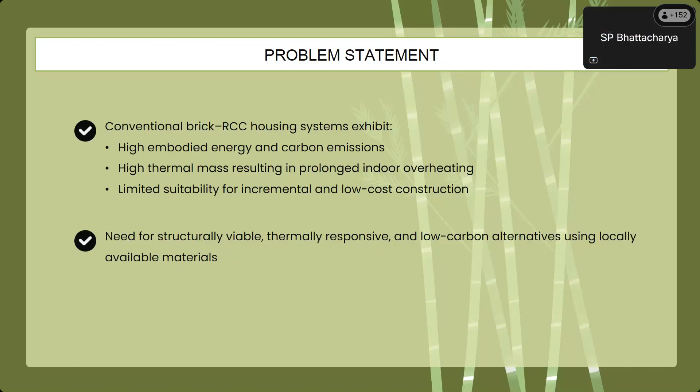There is a lag. No, I want the previous slide. They have high embodied energy, high thermal mass, resulting in prolonged indoor overheating, and limited suitability for incremental and low cost construction. So these are some of the problems.

Therefore, there was a need for structurally viable, thermally responsive, and low carbon alternatives using locally available materials.

Can we go to the next slide? I can share the screen if you're finding there's a lag from your end. There's a lag actually. Would you stop sharing and let me share? Yes, I think that will be good, sir. I'll stop sharing, you share. Let me share. Yes, sir, I'm sharing now. Okay.

Can you guys see my slide? Hello, is the slide visible? No, sir, no, sir, no, sir.

Is it visible now? Yes, sir. Yes, kindly make it full screen if possible. Full screen, sir. I've done it from my end. So is it full screen? It is visible. Okay, yes.

Okay, great. I hope there wouldn't be a lag if I share it from my end.

So how did the project come to us? This is basically part of an incubation project under the Global Housing Technology Challenge. The ministry had launched this challenge in which there were cutting edge technologies from across the world adopted for new construction of houses, enabling speedy construction and many houses. There were also some construction technologies that needed handholding. So the bamboo construction technology that is happening at the moment, or that we found required to be incubated, and that's how the project came to us.

The major focus is not just component level innovation. That is, we used to have component level innovations when we innovated lintels, beams, or door frames. It's not just component level, but more holistic, from system level innovation integrated to a full building. So we wanted a full building innovation, and evaluations were conducted through full scale prototypes.

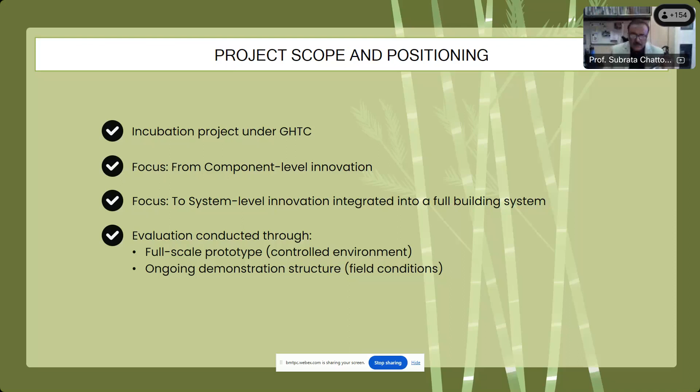Waterlogging was seen, dampness we saw in some cases. So these were some of the issues we found that we need to solve. And then we went about designing.

As I said, we did an extensive field study and laboratory study of the different species we get, and then we chose the species that came out ticking most of the boxes. That species we treated in a borax and boric acid solution, so each bamboo component had been treated for 2 weeks before use.

We also installed a bamboo shredding machine in our lab, which can shred bamboo pieces within seconds, so we don't need to do it manually. Next, the prototype concept was developed because that is how we want to make it foolproof.

So a true scale prototype, 8 feet by 8 feet square, with a built-up area of about 5.9 square meters, was built in our lab. It was constructed in the IIT Incubation Center under STEP, which stands for Science and Technology Entrepreneurship Park. There we hired a space that was our lab, and there, as you can see on the right hand side, we made this prototype stand in full scale.

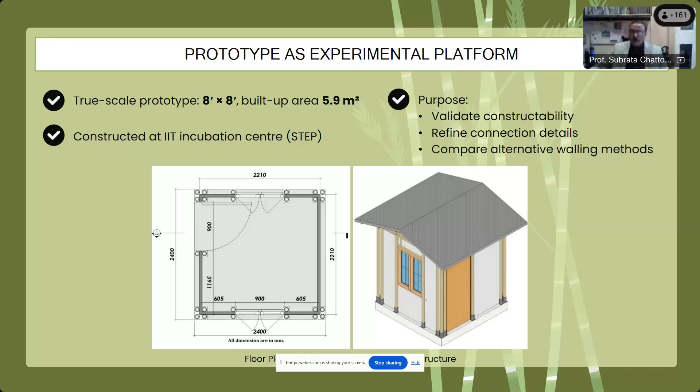The purpose was, we wanted to validate the constructability. We wanted to refine the connection details because when we were doing the local survey, we found that bamboo was also prone to cracking from the connections, so the connections had a real problem. We wanted to refine those connection details and compare alternative walling methods with our methodology that we were going to invent or develop.

Here you can see some of the salient points, the structural and envelope components of our prototype. We were using bamboo reinforced concrete plinth beams with MS connectors. We had built-up bamboo columns and bamboo reinforced mortar, which we call BRM walls. We also had bamboo lintels and beams, bamboo trusses and lightweight roofing, and bamboo doors, windows, and jali. So these were all our structural and envelope components with bamboo.

Now here you can see what were the dimensions. The BRC plinth beam design had a cross section of 250 millimeters by 250 millimeters, and bamboo reinforcement was used. We did not use any steel reinforcement. You can see on the right hand side, during the construction phase in our prototype, in our lab, we did that. This was an integrated MS connector cast within the beam.

As I said, we found that in the traditional system, the bamboo posts or pillars were getting rotten, prone to rotting from the point where they emanated out of the concrete. So we wanted to integrate in our plinth beam a system of MS connectors. This was motivated by our prior experience developing a school building with BRC, which has been in place since 2014, and potential cost reduction was also seen.

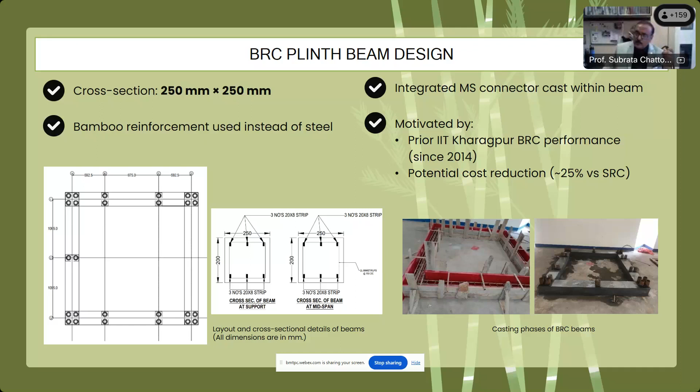Next, I show you what this base connector and geometry is that I'm talking of. We did some experiments on wind loads and other different kinds of load, and we found that the major pillars should use multiple bamboo culms. Instead of a single bamboo culm, we went for a system of 4 bamboo culms for the major columns, and the intermediary columns we did with single columns.

Now these 4 bamboo columns would have these base plates. This is an MS base plate that we developed, and this is one of the innovations that we are putting up for patenting. This will solve the issue of the rotting of the bamboo, and this can replace one bamboo at a time in case you need to replace it.

So the base plate cross section was 240 millimeters by 240 millimeters. We had 4 MS pipes of length 150, diameter 90 millimeters, and thickness 5 millimeters. They were anchored by a bolt of length 170 millimeters, and this enables axial load transfer and wind load resistance. We found that this really helped a lot in terms of transfer of wind load and load transfer.

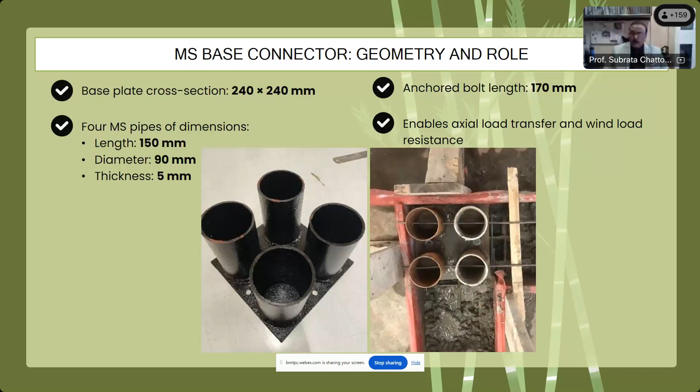Next, in this slide, we are trying to show you the built-up bamboo columns configuration. As you can see, this is from the real pictures. So multiple bamboo axial members, as I said, 4 bamboo columns, with the culm embedded into the MS pipe at 150, and the length of the MS pipe was 150, so it was secured in the MS pipe. The packaging tape, which is a waste product, we use to tie. You can see in the left slide here, this packaging tape we selected. Now, due to higher load capacity and the column typologies, we had the corner columns with 4 culms and the interior with 2 culms. So this is the configuration of the prototype.

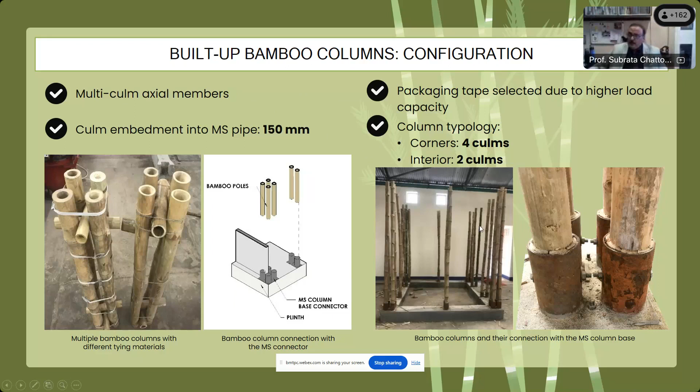I hear some voices. Do you have any question here? Yeah, thank you very much.

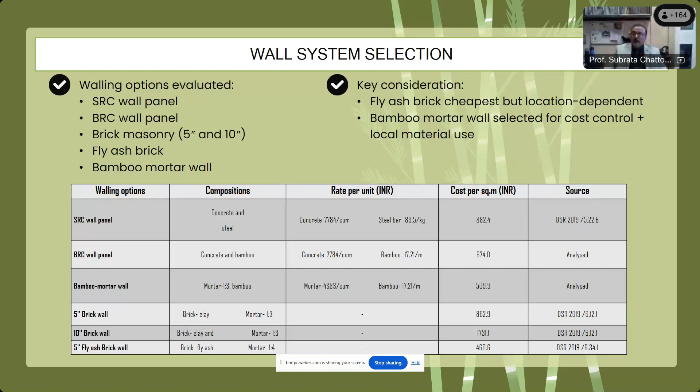We applied the DSR rates of 2019, DSR 5.22.6. When we did the comparative analysis of cost per square meter, fly ash bricks came out the lowest and bamboo mortar walls came second lowest. But fly ash has its own limitation - it is only available at sources where fly ash is generated. So we ruled it out, because we were concentrating on areas where bamboo is available, not necessarily where fly ash would also be available. That cost was coming to around 509 to 510 INR per square meter.

Next, we show you the bamboo reinforced mortar, or BRM, wall panel, and how we did it. We did a thin mortar matrix reinforced with bamboo strips - you can see the strips, and I'll give the dimensions and spacing in a bit. The bamboo here acts as a distributed tensile reinforcement; bamboo's properties are very similar to that of steel. We also used chicken wire mesh for confinement of the mortar, and we felt this was suitable for both precast and cast-in-situ execution. We actually did both types in our prototype.

Here you can see the BRM wall panel lab-validated specifications. The panel size is 1 meter by 1 meter. The bamboo strips, which we shredded in our bamboo shredding machine, were 20 millimeters by 6 millimeters. The spacing in the X direction was 120 millimeters, and in the Y direction was 40 millimeters. One issue bamboo poses is that because of its shiny outer surface, bonding with concrete or mortar is a big problem.

This is something people have been experimenting with for some time. To overcome that, we used a Sikadur 32-LP gel with medium sand. We painted this Sikadur onto the bamboo with brushes, and when we use this gel, it creates a rough surface - it changes the smooth bamboo surface to a rough one, so the adherence was much better. This way, we could sort out the problem of adherence between the mortar and the bamboo cage.

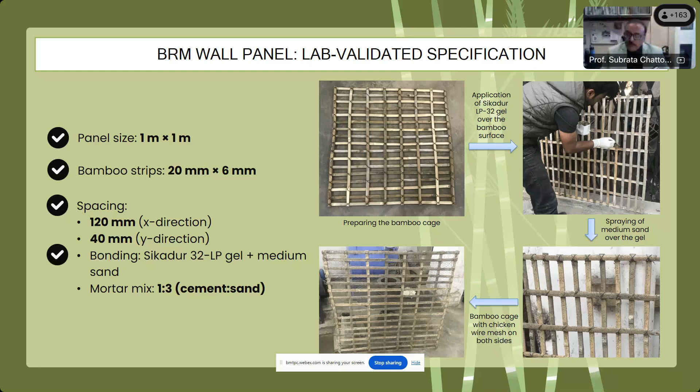In the pictures you can see the application of Sikadur - we apply it with a paintbrush, and then we spray medium sand over the gel, which gets stuck to it. Then the bamboo cage is made with chicken wire mesh on both sides, as you can see in the bottom left picture.

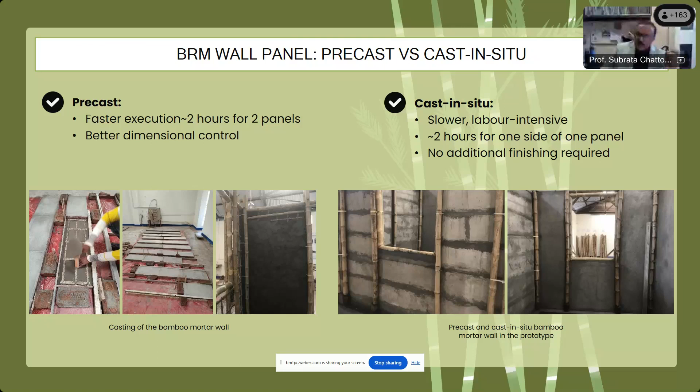Next, we show you the BRM wall panel - precast versus cast in situ. As I said, in our prototype we used both types, because we had the intention - and still have the intention - of making this a factory produced material. If it can be done precast, we can sell or package the bamboo precast panels so they could be bought from a shop. We did both: the precast was faster in execution, taking 2 hours for 2 panels, with better dimensional control since it's factory controlled. The cast-in-situ method was slower and more labor intensive, taking about 2 hours for one side of the panel, though no additional finishing is required.

Here you see BRM panel size and cost optimization. We tried to determine the right size and how to optimize cost. The final precast panel size came to 1200 by 450 by 50 millimeters, selected for easy manual handling. The cost decreases with increased strip spacing: with 80 millimeter spacing it comes to 564; at 100 millimeters the cost goes down further; and at 150 millimeters it goes down to 491 rupees per square meter.

In the table below, you can see the number of longitudinal and transverse bamboo strips, the spacing of longitudinal bamboo strips, the rate per unit, the total cost, and the cost per square meter. These are hovering around 500 to 550 rupees per square meter. For a 5 by 5 configuration, it is 564; for 4 by 5, it is 527; and for 3 by 5, it is about 491.

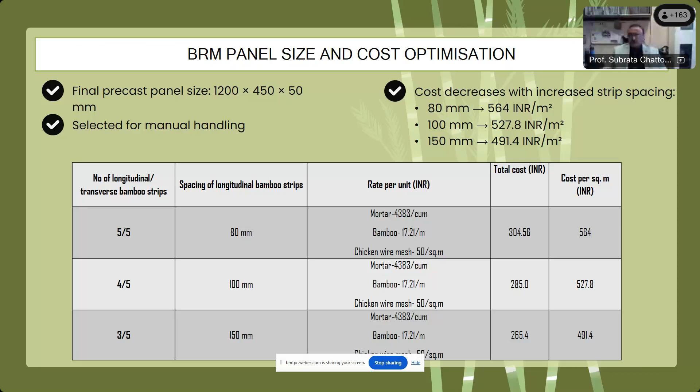I already told you there was a problem of bamboo splitting at the joineries. So what we did was use MS washers and bolted the joineries, and that has reduced the scope for splitting. Bolted connections were adopted to prevent splitting and improve reliability over nailed joints. So we do not recommend nailing of bamboo, which is a very prevalent practice. We would recommend the method of bolting it using MS washers.

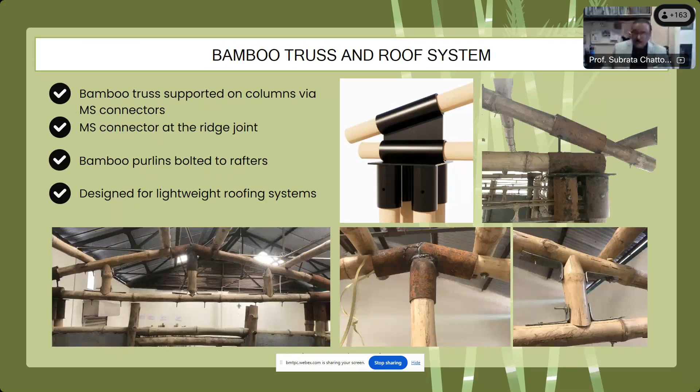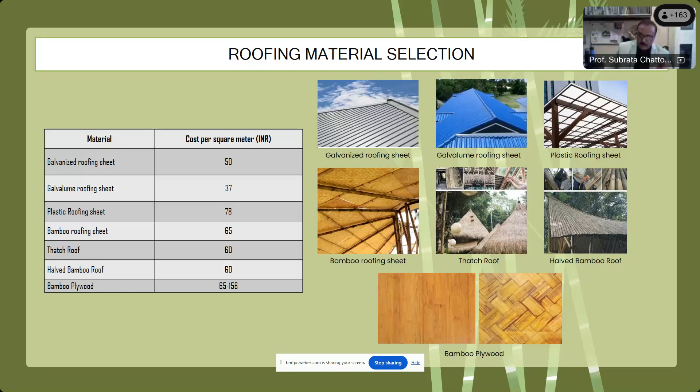Here is the roofing material selection. We had choices ranging from galvanized roofing sheet, which is very common in these peri-urban areas, to galvalume, to plastic roofing sheet, to bamboo roofing sheet, to thatched roof, to halved bamboo roof, and bamboo plywood. We did a cost per square meter comparison, and you can see galvalume coming out as one of the cheapest - that's the blue one in the picture. So finally for this project we have gone for galvalume roofing, which is basically an alloy. But you have the cost comparisons of all the other roofing materials.

Now for this roof, to do some passive thermal strategies, we thought we could do a bit of a green roofing technique. A bamboo mesh mat was placed over the galvalume sheet, which can support climbers. It's very simple and also very prevalent, and this galvalume roof can have these creepers, which finally brings down the thermal load. The intention was to reduce the solar heat gain, combined with a lightweight roof mass. So it's great.

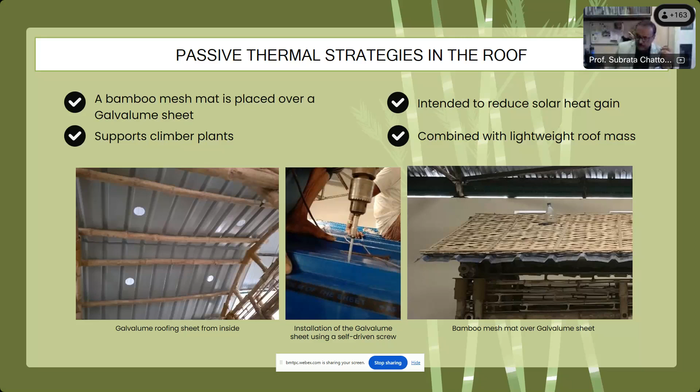And here we are showing you some pictures of how, over the galvalume, we wanted to create a layer of green roof that would further improve our indoor living conditions. We also had a higher ceiling in the central spaces, which would increase the indoor livability measures.

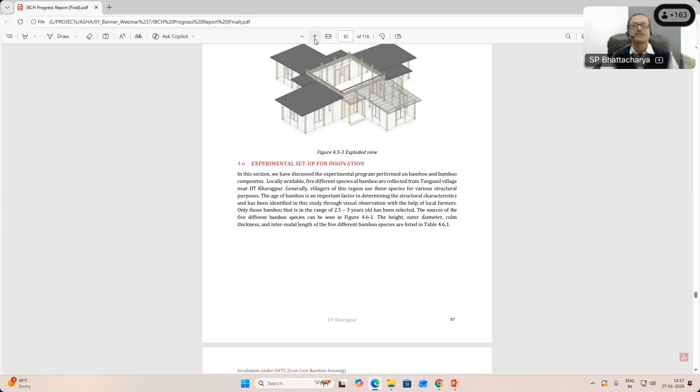Let me share one of our reports that is in the domain of BMTPC. So this is that. Can you see if this report is visible? It is a PDF report. Is it visible?

Yes, sir. So we initiated some of our initial experimental innovation in the civil engineering department lab. As Professor told you, we had initially done a lot of study about the different species of bamboo available in and around South Bengal, and those were taken from the different villages, not from the markets, because those have some kind of commercial value.

For those particular bamboo species which are available plenty here, we first checked their tentative height, tentative thicknesses, and so on. So these are some of the things we studied.

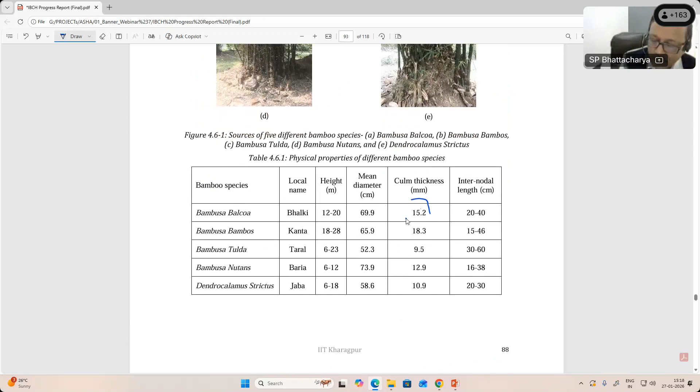Then, what is the inter-nodal length? Node length means, suppose this is a bamboo something like this, so there are some kind of nodes. These are some joints. So what are the typical types of node lengths and all that, we have studied.

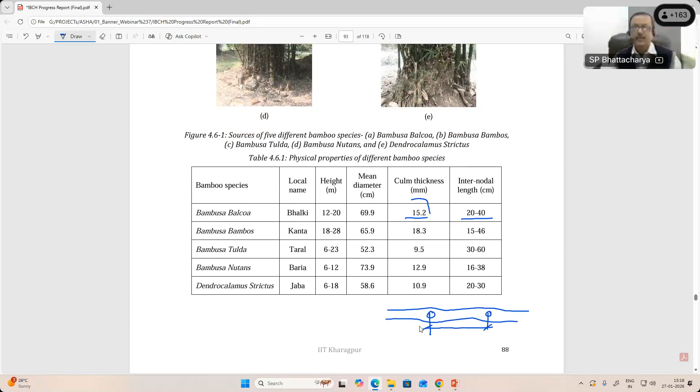So that is the initiation, and then we did some kind of treatment, as Professor already told you. Then we started testing the bamboo in various load conditions.

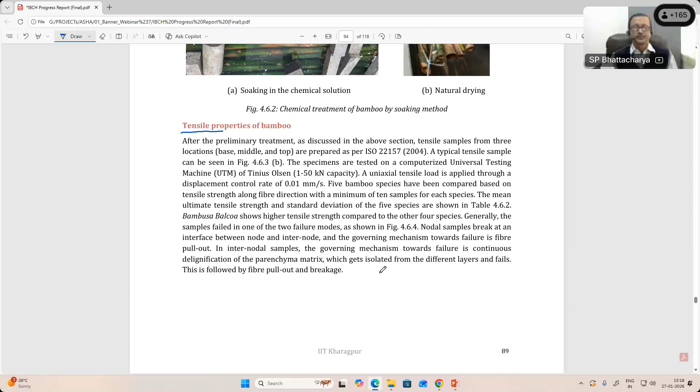First of all, we tested for the tensile properties, because bamboo is actually a long fiber, and fiber has enormous strength to take care of the tensile stress developed in any kind of structural material. We used the UTM, the universal testing machine, and from that testing machine we prepared—you can see this particular figure, 4.6.3c, where a small specimen has been tested against tensile load.

If you see all 5 types of bamboo species, we have actually come across with 10 samples, and we see what is the tensile strength of that particular species and all, which gives a tensile strength in and around 70 plus to 140 megapascal or so.

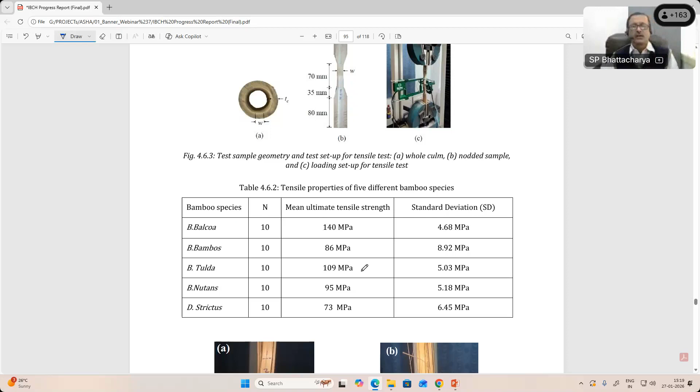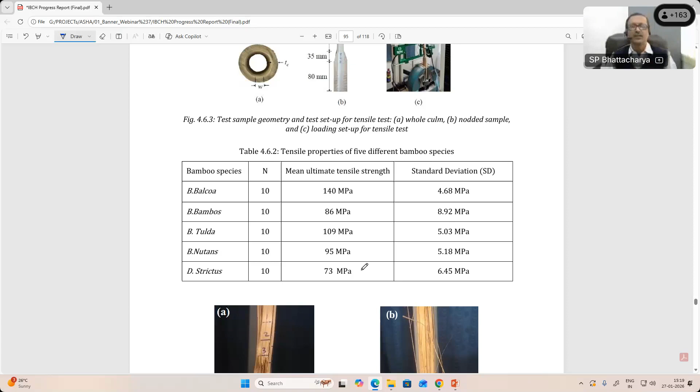Now, you may say that it is a little below steel, but since we are not using it for a very long span member, for housing whatever the span length, it can be accommodated with this particular tensile requirement also.

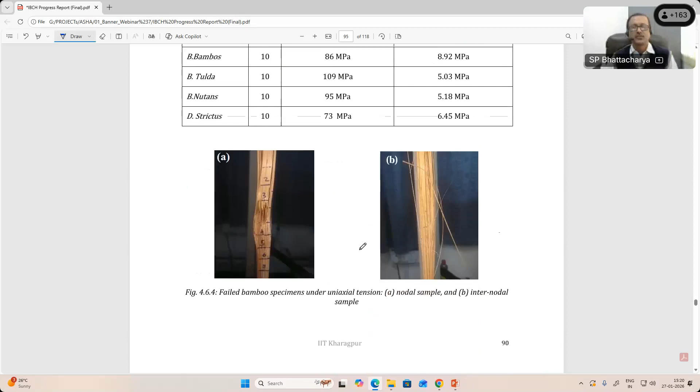After the tensile testing, which was our good finding, we also tested for compressive properties, because compressive property is very important. As you understand, it is a fiber—it may have good tensile property, but under compression the fiber may dislodge and disintegrate. So that is another issue.

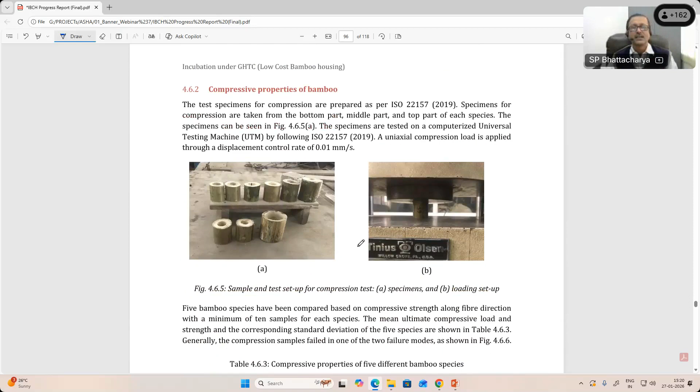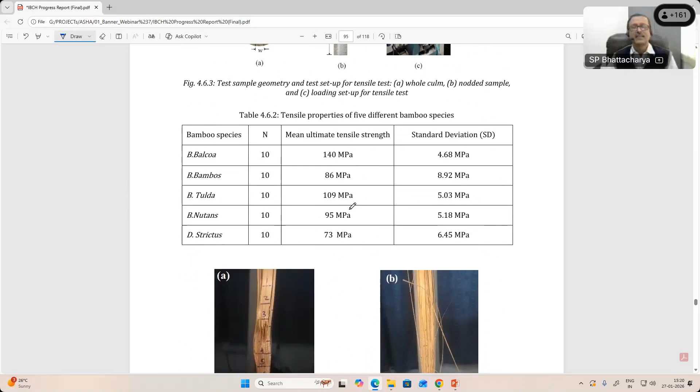So we also tested it in the compressive machines, and we found a comparable loading or stress compared with the tensile strength. If you compare this mean ultimate compressive load, which is again 63 to 154 or whatever, with the tensile strength, it is something like steel, which has both good strength in tension and compression.

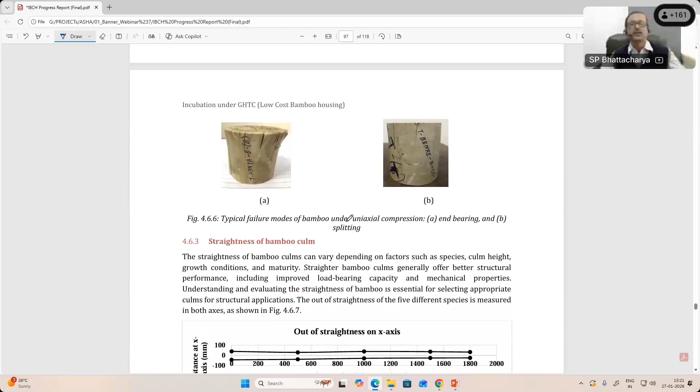So this particular result now confirms that yes, we can actually use the bamboo strip in the long fiber direction for any kind of structural member. If you see our prototype housing that Professor Chattopadhyay has shown, we have two such members where we can actually use it.

One is the plinth beam, where we have not used any kind of reinforced steel reinforcement—all are bamboo reinforcement, even the stirrups are also bamboo. So we can use that one. We can use the bamboo without any hesitation, because it has comparable good amounts of compressive and tensile strength.

The next one is our bamboo reinforced mortar, the BRM wall, because the BRM wall has to be designed for its own weight and also some kind of transverse load because of high wind or so. So for that, these two members can accommodate your bamboo strip.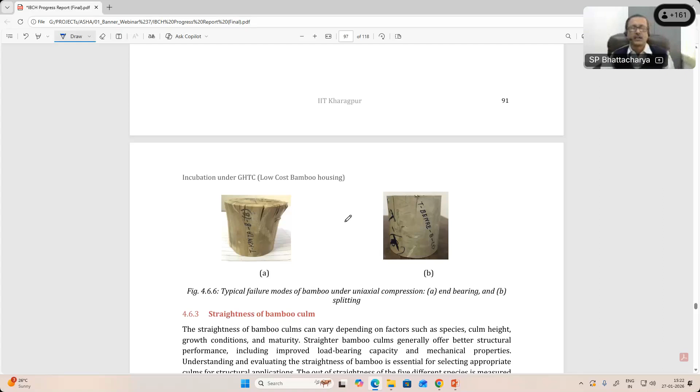But next, when we go for our truss member or those bamboo column members, it is an individual bamboo we have to rely upon.

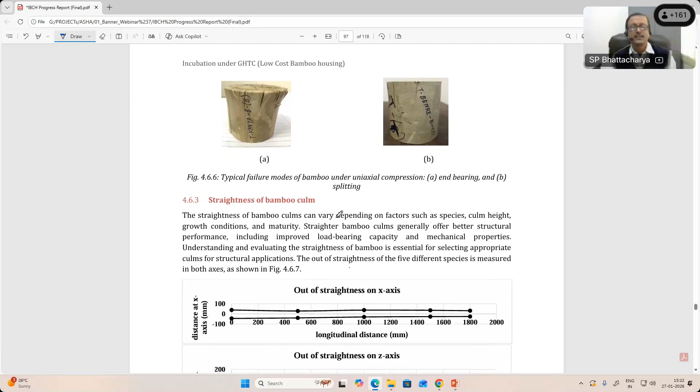So whenever we have to go for a column member, a lintel beam member, a beam, a truss rafter, or a tie beam, we have to check the straightness of the bamboo. Because bamboo is a natural material, it cannot be an industrial product that gives you a perfect straight line or a prismatic geometrical shape.

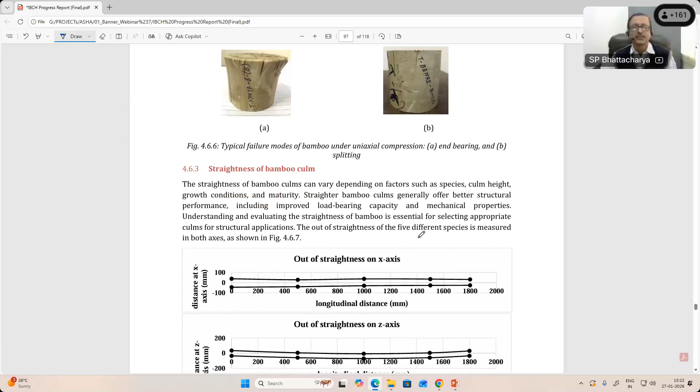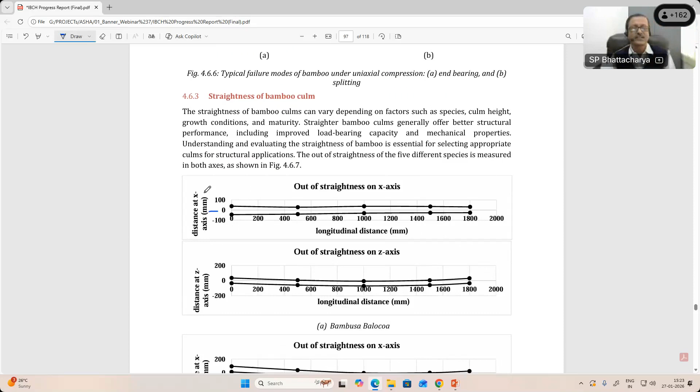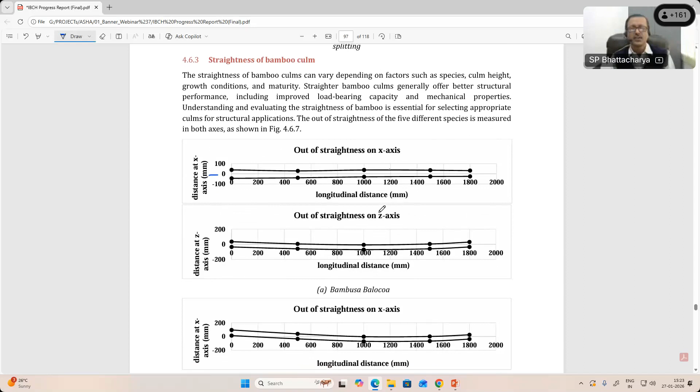So we have tested what is the deviation. This is the zero or the mean line, and we tested how much it deviates from this mean line after a certain distance, maybe 500 mm or so. Both from the x direction and the y direction, z direction also, if you take this direction as the z-axis and this as the x-axis, deviations are definitely there.

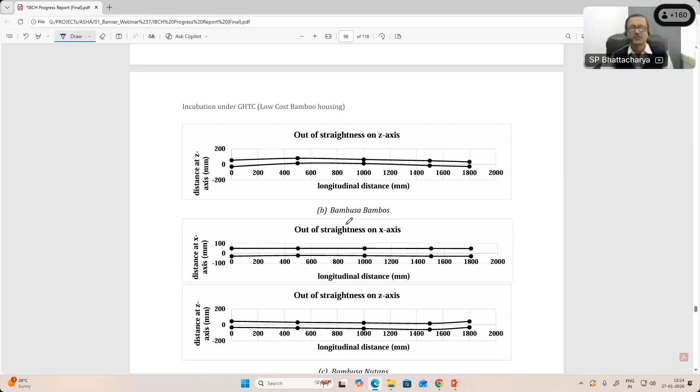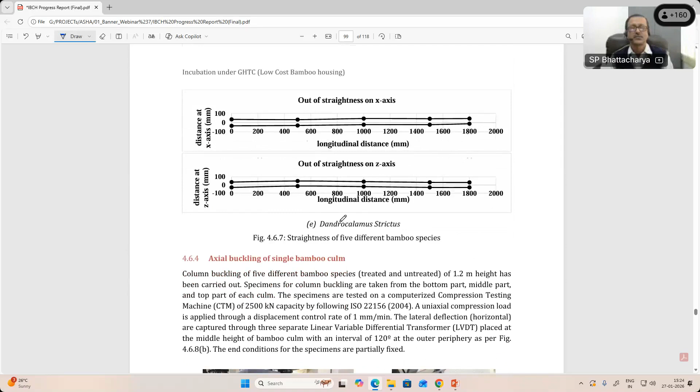This is over a length of 6 feet, which is 1800 mm, and within that 6 feet, some visible deviations are noticed. But not all bamboo species are the same from the component point of view and the different species point of view - the straightness index or straightness property is not equal for all. So we have to choose bamboo with higher straightness property for long members like tie beam, rafter, and the four-bamboo column systems. This test gave us confidence about which of the 5 species we can go for.

Then we go for axial buckling of a single bamboo and also axial buckling of the 4-bamboo component. Why is buckling required? Because we are not expecting that much high axial load from the top, since it's a GI sheet, or maybe thatch roof, tiles, or some local vernacular material which may not have heavy loading on the bamboo.

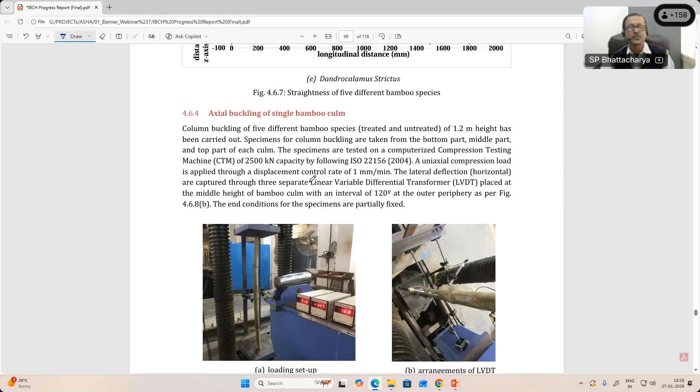But this South Bengal area, or Odisha and South Bengal, where bamboo and mud-bamboo is one of the local materials for building construction which we want to replace, this area is prone to cyclonic storms. Whenever there is a cyclone, the behavior of the column will be different - it will not only take axial load but also transverse failure, and then buckling will come in. So we ensure that these straight bamboos acting as a monolithic column, or 4 bamboos acting as a monolithic column with the packing strip, should also be perfect from the axial buckling point of view.

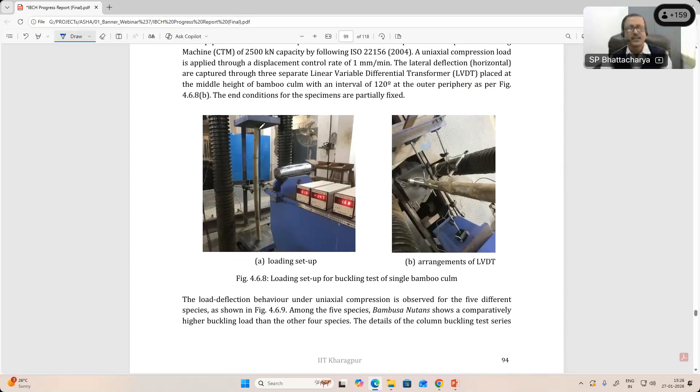So we got some kind of horizontal result. Going back to this experiment in our lab, we increase the loading from the top, and as it increases, there is a deflection we observe - one is the horizontal deflection, which relates to buckling, and there is also a vertical deflection, which is a little bit smaller in nature. So both vertical and horizontal deflections are noted.

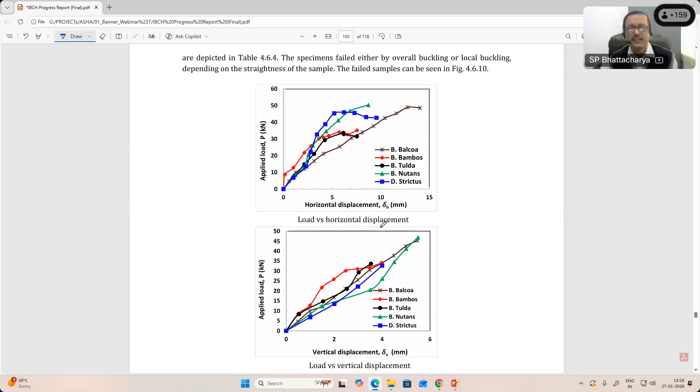If you see this graph, it's very interesting - the vertical displacement, the lower one, is almost like a perfect straight line. What does that mean? As the applied load is higher, the deflection is higher, which is very natural and logical, and it follows a straight line, meaning it's under the elastic limit - it doesn't abruptly change linearity.

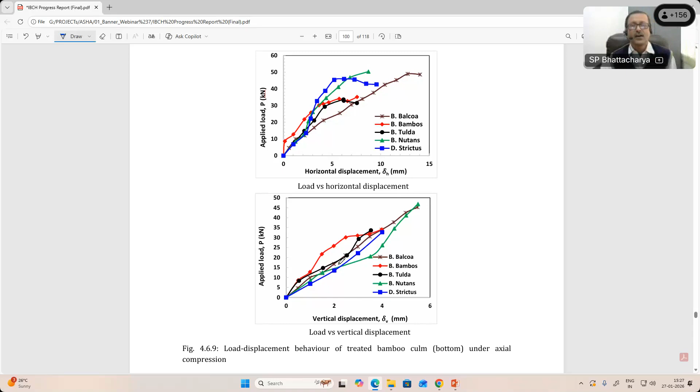In the horizontal displacement, if you see, initially it is linear for all species, and then after a certain distance it goes non-linear. So we can say that after a certain load, maybe around 25 kilonewton or so, the behavior of this bamboo as a column in terms of horizontal displacement is inelastic in nature.

So we want to catch that particular point - I know it will eventually fail somewhere, but like any other material, steel is also going to buckle, and where it buckles is very important to know. That's why it's important whether we go with a single bamboo, two, or four sharing the load. We found something like 20 to 30 kilonewton is the range where it starts to become a little non-linear, and once it's non-linear, you cannot predict the behavior properly, so it's better to restrict yourself within that range.

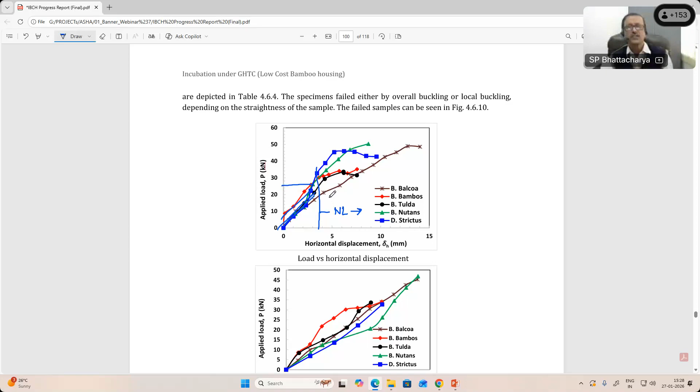So this is, again, we got some kind of idea of how it can be placed. These are some of the pictures when we tested that in our lab, showing the failure mode of the single bamboo.

After that, axial buckling of the multiple column setup, we took 4 columns. The idea behind using 4 columns is that in between them we can actually plug in the bamboo reinforced mortar panel. That was the biggest benefit of the 4-column system, and it also helps in tying it properly in a symmetrical way, with the load distributed into 4 hubs.

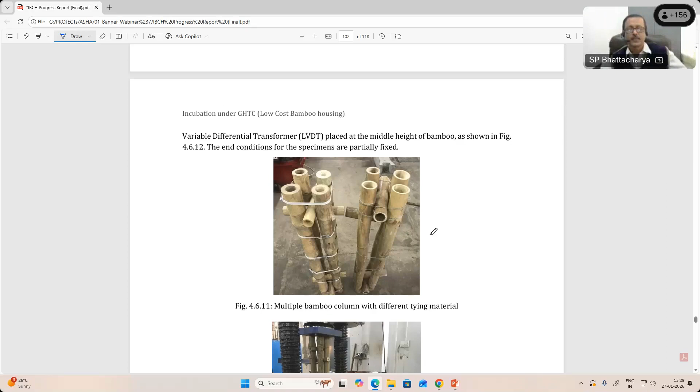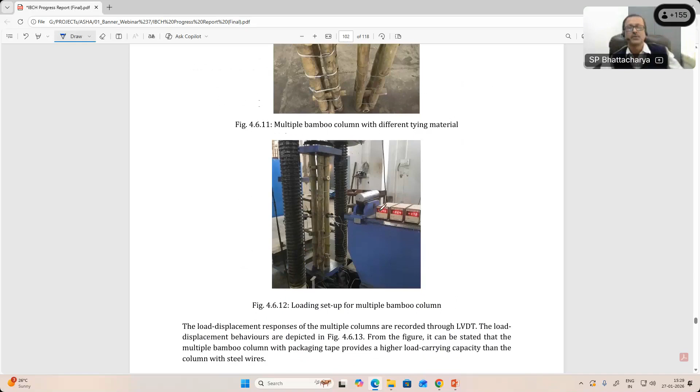So this particular bamboo is the 4-column bamboo for typical bamboo species. The 4 typical bamboo posts have been tested at various levels. We put in some kind of spacer, which is again a small bamboo log, and tested for horizontal and vertical displacement, from which we can find out the mid-span deflections.

We noticed that the value jumped, where initially the deflection was going abruptly with non-linearity. Here we got almost 150 to 200 kilonewton with the 4-column setup. So we are very happy that the linearity goes up to about 150, 175 or so.

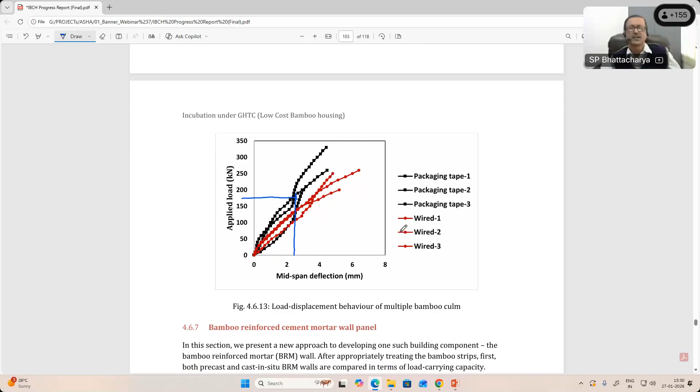With different types of packing we used 3 different types of wire, and then we used packing tape, because both showed good agreement with the load and behavior.

Finally, we also tested these. So these are the tests we have done. There's another test I will tell you about a little later. And then we move into this BRM wall testing.

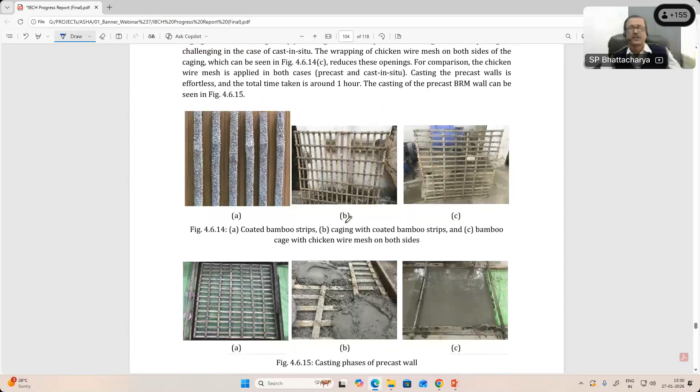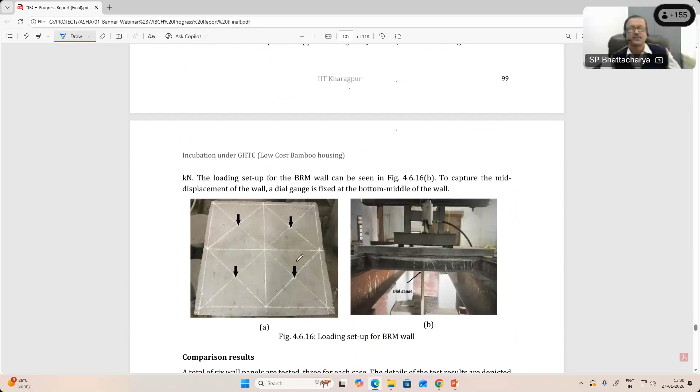As Professor Chattopadhyay told you, the mechanism of how we prepare it with Sikadur and all that. Then we started testing it in the lab, making panels and applying a 4-point load uniformly across the 4 different quadrants of the particular slab.

And we finally arrive at a value for the ultimate load strength and the maximum deflections. These are the BRM PW and CW panels. Those are cast in situ and precast — PW stands for precast, and CW is the cast in situ wall.

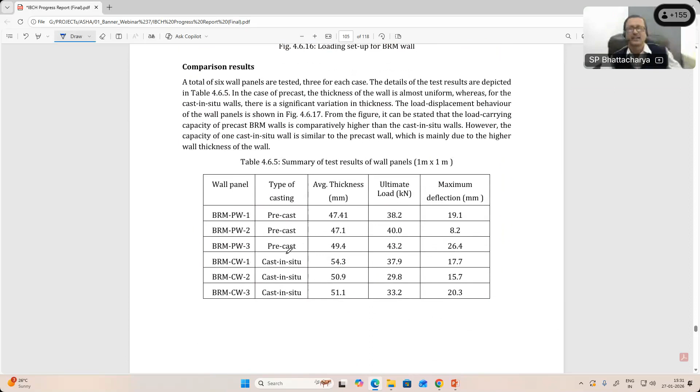We tested both panels, and they gave a similar kind of ultimate load, ranging between 30 to 40, or 43 or so. The deflection behavior under load is also proper, and it follows the typical pattern of concrete or other such material.

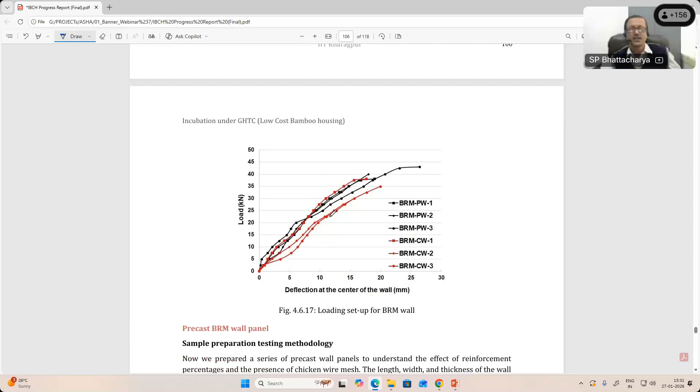No kind of sudden failure or anything of that sort has been noticed, which would be a concern for applying it to a wall. And then this is the way we set up the load test for the wall panel.

In the earlier setup, this is for the 4-point load. If you see in this particular jack, this is the loading jack, this is the loading platform, and there are 4 contact points applying 4 loads, which we can say act as a kind of uniform pressure load on the panel itself.

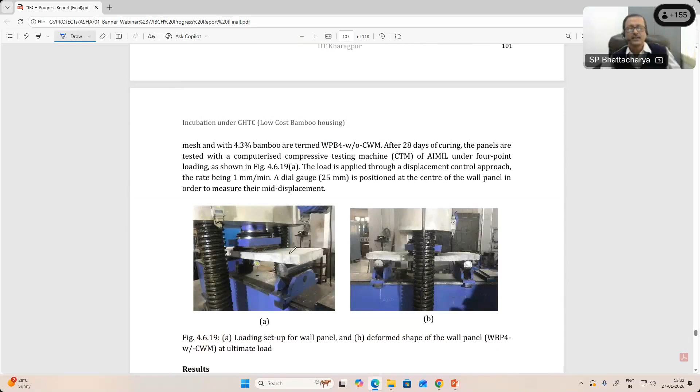The next one we did is tested with a single load point, using two different types of wall panels with different spacing, as the professor already told you about the x-axis spacing and y-axis spacing, 80 mm, 100 mm or so.

This is CWM, W/CWM, that is with chicken wire mesh. So we did tests with chicken wire mesh, and also without, that is O, without chicken wire mesh, to see what change occurs in the result. There was no such significant change in the result.

The result is almost the same way it has been built up, and then it goes to failure. So chicken wire mesh cannot contribute that kind of enhancing the load carrying capacities also, that we understood.

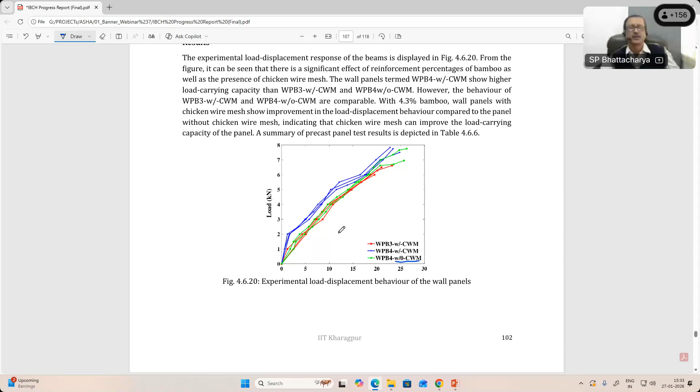But chicken wire mesh we have still put forward for this element design or this BRM, because there are two reasons. One, it will furthermore enhance the adhesibility or bonding between the two layers of mortar. Number two, a layer of chicken mesh on both sides will definitely allow us to accommodate thermal movement due to day-night temperature variation. When there is a day-night temperature variation, there will be some kind of expansion or contraction in this particular material or wall panel, so that can be taken care of by the chicken wire mesh on both sides. But introducing that doesn't help us enhance the strength.

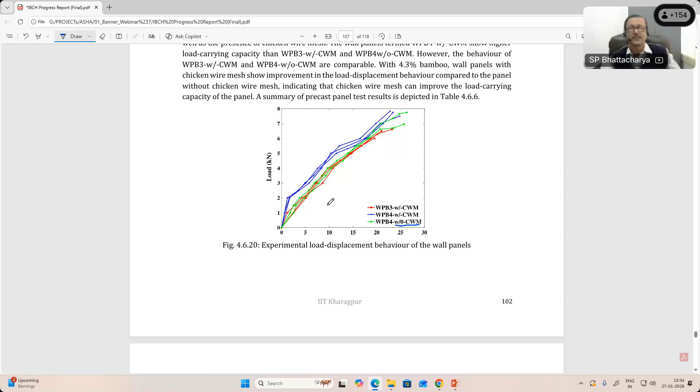So these are some of the tests we have conducted. Now let me go back to the PowerPoint presentation once again, where we are somewhere here probably.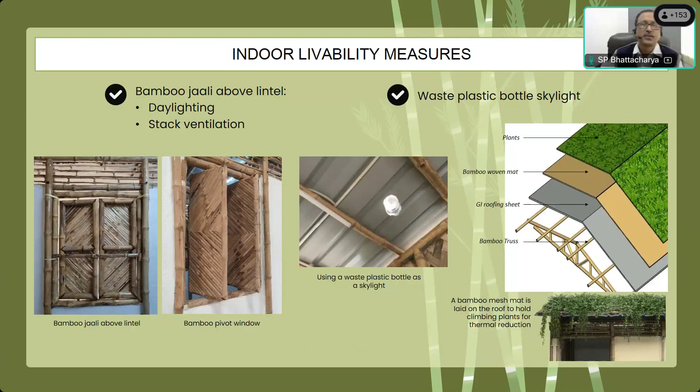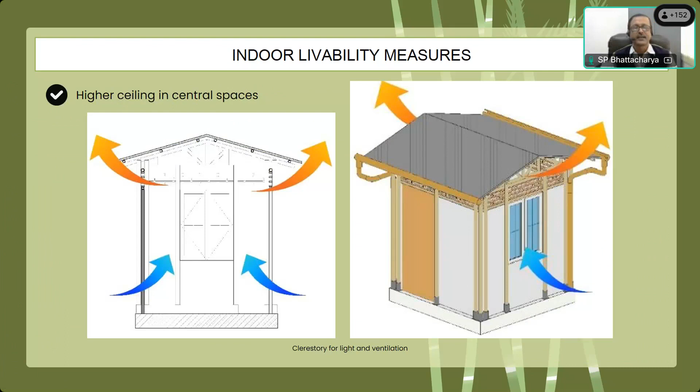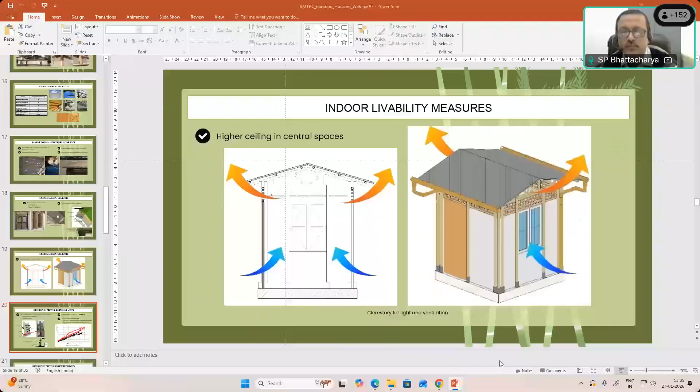As Professor told, is it visible in full screen mode? The PPT, yes sir. As Professor told about indoor livability measures, we have provided some ventilation at the roof level where the stack effect can be enhanced. We did those connections, joints, and experiments, those load displacement diagrams. Yes, because your PPT is not coming, it's a previous report which is still showing. Okay, just a minute. Sir, is it visible now? It is coming but has not opened yet. Yeah, now it is visible.

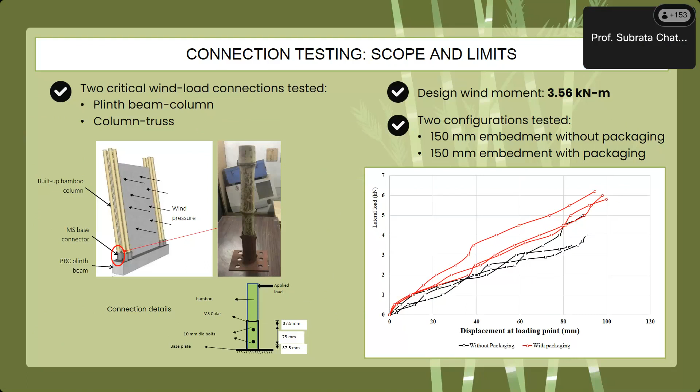Okay, so these connections and the wind pressure and all those loads we have just now discussed. These are again the loads, and another interesting test, the data was not there in the report, or maybe that was added later. So you have also tested for the connections.

As you know, again, if I repeat, we are here in South Bengal which is prone to cyclonic storms also, where we require a lot of connections. That is why perhaps we introduce those gussets and connections by virtue of steel pipes and gusset plates, because connection is very important.

So if I say, it is said that in cyclone cases we have to go with the ABCD principles. What is that? A is anchorage. Anchorage is very important, you have to ground the thing, otherwise things will wash out or blow out. So anchorage, that is why we introduce the plinth beam, and there is a sufficient amount of anchorage in the foundation.

The B is bracing. We require those kinds of bracings, and they are required when we can go for a little bit of long span trusses also. For trusses, we go for inclined bracings or tie members or other members. Bracing is required because that will distribute the load properly.

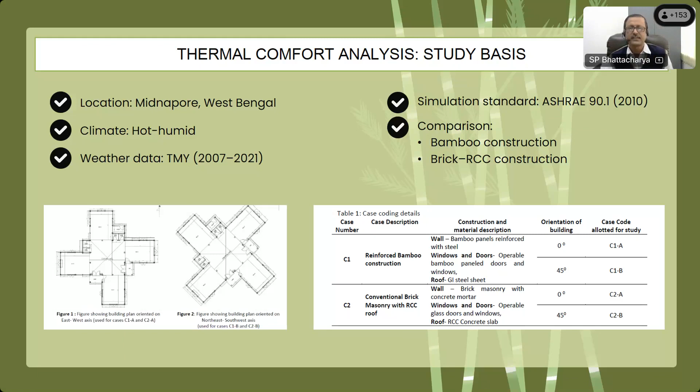signature, the thermal signature image, where in the x-axis, if you see it, these are the January, February months, and the y-axis is the hour of the day, so from 0 to 24 or something is there.

So we did it for 24 or 25 days of a month, keeping 4-5 days aside because there may be some kind of holidays or something like that per week. So this actually gives you a pixel of 12 multiply 24 pixels.

So our data - if you see this, the red color one is the stressful areas or stressful time where the envelope heat gain is maximum. So visually, case one is the bamboo construction set, that is our BRM one, and the conventional brick looks alike, but the conventional brick is of 250 mm thick, while in the bamboo construction we have used 3-inch, 75 mm, 3-inch. So if we have a potential amount of thickness increment, definitely the red colored zone should be minimized with respect to case 2.

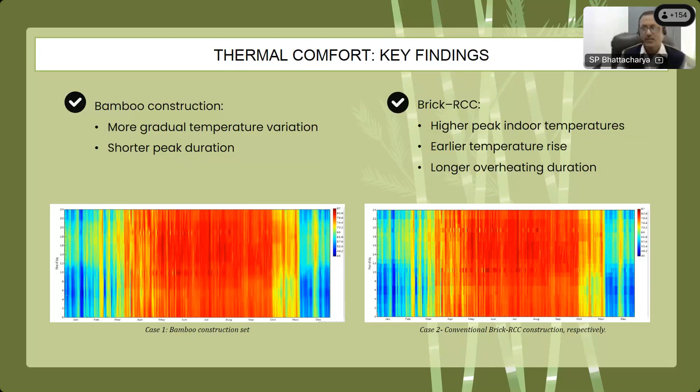It will increase the cost, but on the other hand, it will decrease the thermal load, or make it more comfortable. So comfort, we put in the second bench - that is why we keep it still at 3-inch, we go with the 3-inch kind of scenario. And probably we will think of some other way to insulate that in the future - we have something in mind. We can go with some kind of EPS kind of solutions also.

That will definitely increase the cost a bit, but decrease the indoor ambient temperature also. Whenever you ask how good it is from the energy point of view, we have to look at two typical points. What is it?

It's embodied energy. That means when I'm going to construct it, what is the embodied energy of it? How much material am I actually using for this construction? Each and every inventory of material has some kind of energy contribution or energy footprint, so I have to talk about that, and also about the operational energy analysis - after construction, when it is operated for its whole life period, what is the energy use because of these envelope parameters.

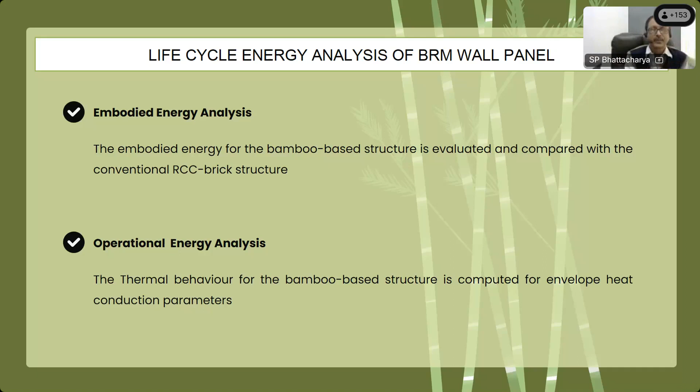If I divide that by the built-up area, keeping the built-up area same, the total embodied energy is 232 gigajoules, and this is about 600 to almost 700 gigajoules for the same area. So the energy footprint normalized per meter square is 1.25 for the bamboo structure, whereas it is almost three times the impact for the other.

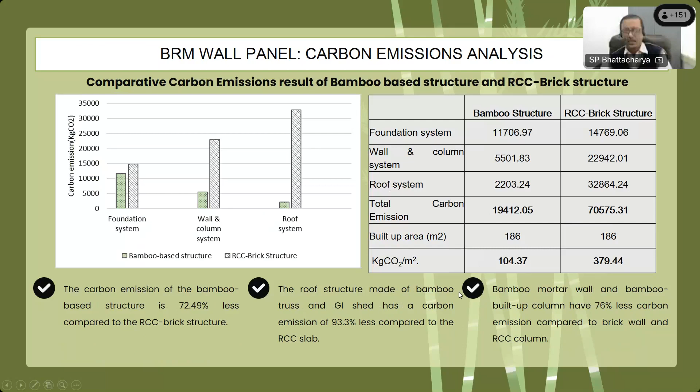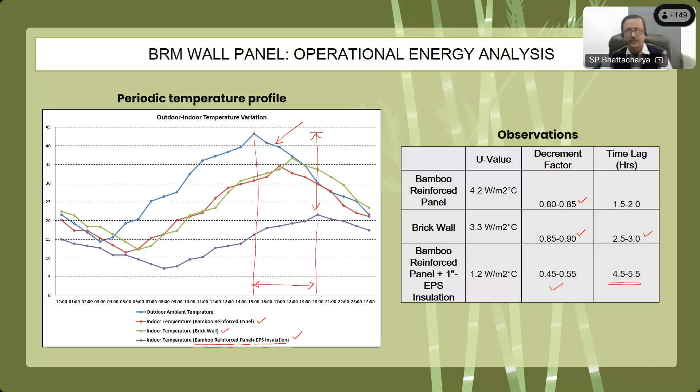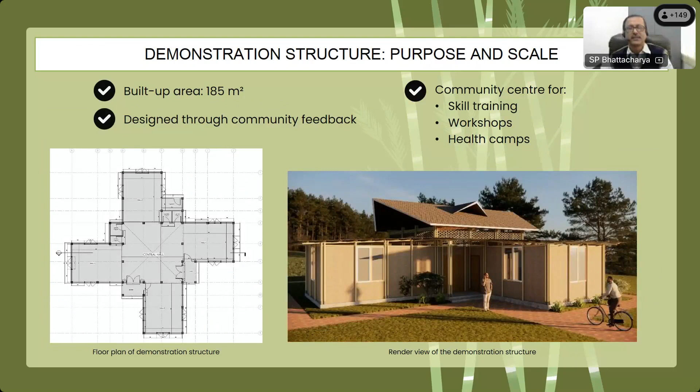So this we have computed, not tested, by virtue of our computation equations and some kind of modeling we have tested. We did it for our lab, for our site, and this is that particular building where we did some of these components in 3D.

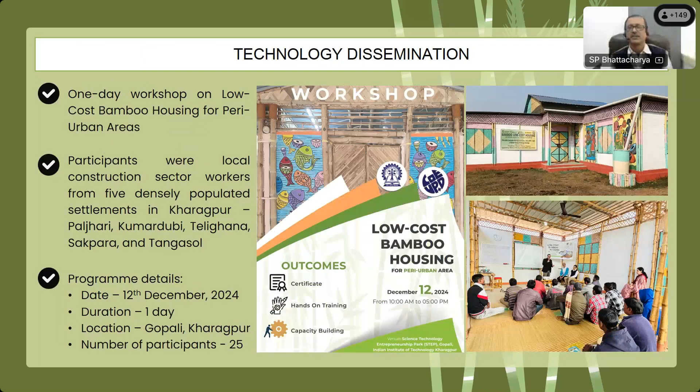So we also did some kind of technology dissemination with the local villagers. We did a workshop, tried to understand their problems, and they gave us a lot of feedback after this particular workshop, and wholeheartedly welcomed this particular product. These are some of the workshop photographs - the first one, Professor Hemanti Banerjee is presenting, and these are some of the participants.

And I request Professor Chattopadhyay to end this particular lecture with the TRL level slide and some concluding remarks, sir.

So your slides have not moved from the BRM wall panel. In my screen, I see the BRM wall panel. Sir, it may take some time, maybe.

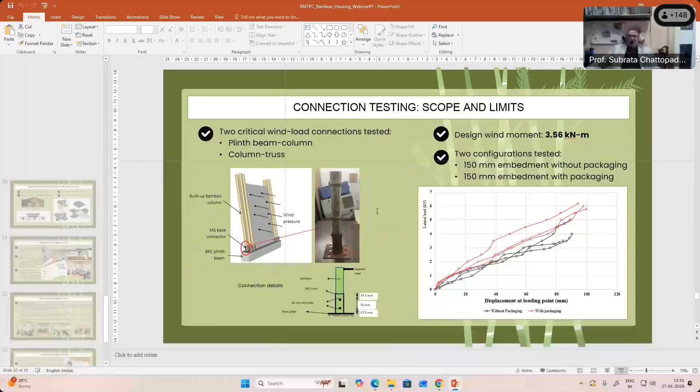No, not moving. They were moving before, but now... Sir, is it visible now? No, it is stuck on the BRM wall panel operational energy analysis slide. Just a minute. Maybe if there's an issue forwarding the slides, you can give the concluding remarks and we can wind up. So Shankha, you can finish it up. Now the slide has come, you can put it in full screen. Sir, this is in full screen now.

Sir, please go through this particular slide, the TRL level slide, and conclude from your end. So participants, as I was telling you, from 1 to 9 is the TRL level. When you have basic technology research, it is at level 1, then research to prove is level 2, and it goes up. When the technology came to us for incubation, it was at a very primitive level.

Though they had tried out making some bamboo houses, they were not able to identify what the issues are, and there were several issues. Like we went to Lakhimpur, we saw the one in Bihar, and there were several issues. I'm happy to say that in a very systematic way, we have been able to identify the issues, solve them, innovate some of the components, and our prototype as well as the actual building, which is a community center for the people around.